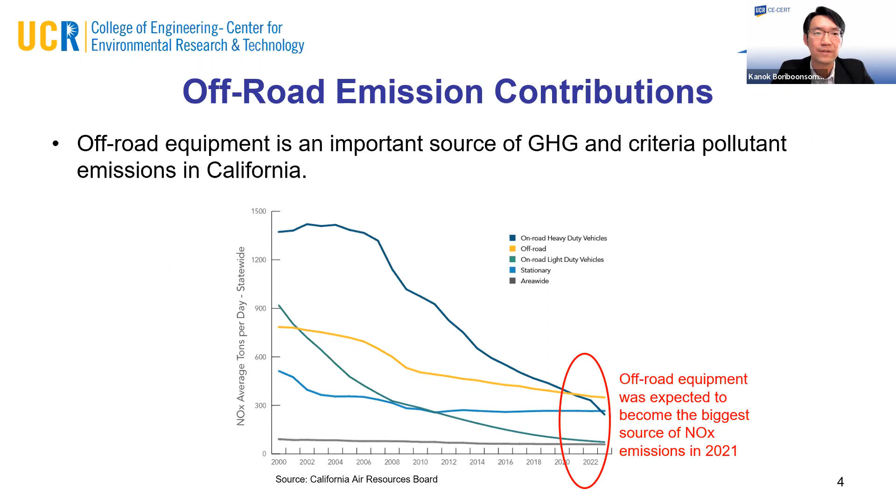But over time, their contribution has been decreasing, and it was projected that by 2021, off-road equipment would actually take over and become the biggest source of NOx emission in the state. I haven't had a chance to look back to see if that's the case, because now we are in 2022, so it would be interesting to see.

And as you know, back in 2020, the California governor signed executive order N-79-20, also mentioned by Xi. That executive order mandated 100% zero emission vehicle sales of passenger cars by 2035. Along with that, it includes several other mandates, and the one applicable to our presentation today is the last one, which mandates zero emission off-road equipment by 2035, with the caveat of where feasible.

We were in the middle of the project when this executive order was signed, so hopefully the research results from this project could help with determining where it's feasible to electrify or go zero emission for off-road equipment.

In terms of project goal and objectives, the overarching goal of the project is to look at different pathways for hybridizing or electrifying off-road equipment in order to maximize both climate and air quality benefits. We also want to make sure that these pathways are technically as well as economically feasible.

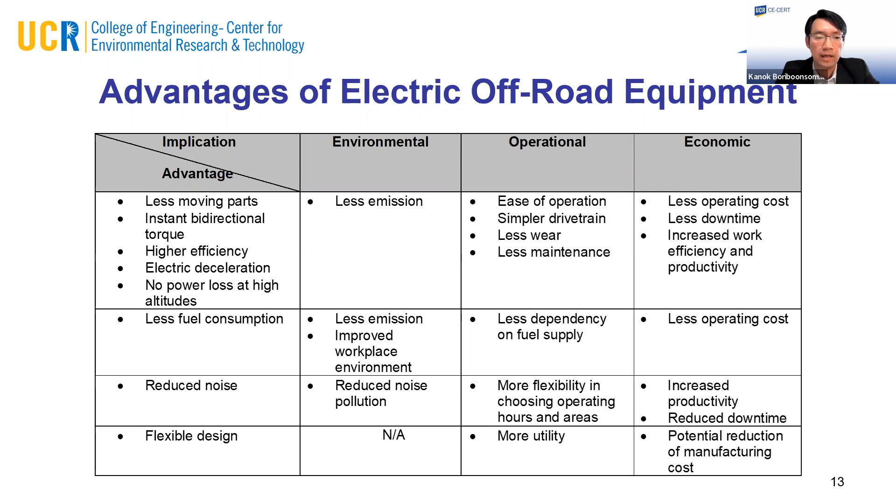And from our review, we also identified advantages of electric off-road equipment as compared to their diesel counterparts. And there are many of them, right? There are fewer moving parts. The electric motor has higher efficiency, and obviously, if it's fully electric, they consume no fuel. And one of the things that is a little bit surprising and not receiving a lot of attention is the amount of noise that is reduced. Electric equipment is a lot quieter than diesel equipment, and that is something that operators enjoy a lot.

But there are still a lot of barriers to overcome in order to make electric or zero emission equipment more prevalent. But for each of these barriers, there are also potential solutions that can be used to overcome them. The main one, the first thing in a lot of people's minds, is the short operating range, because of the limitation in how much battery can be packed onto the equipment. But as I showed in the previous few slides, that is changing very fast.

Another major one is the lack of charging infrastructure. And that's true not only for the off-road sector, right? That is also a concern with on-road vehicles as well. And obviously, cost is still a major barrier. These electric versions of the equipment are still much more expensive than the existing equipment, and there will need to be some incentives in order to help bridge the cost parity gap at this moment in time.

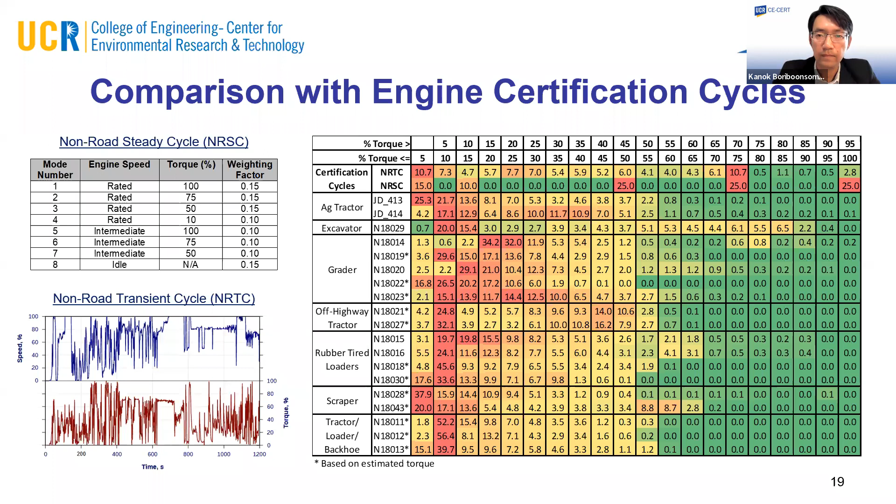This slide shows the detailed joint distribution of real-world data in terms of torque and engine speed as compared to the joint distribution of the certification cycle. And again, when we look at the histograms for the engine speed as well as for the torque, we see that the two histograms are quite different from each other.

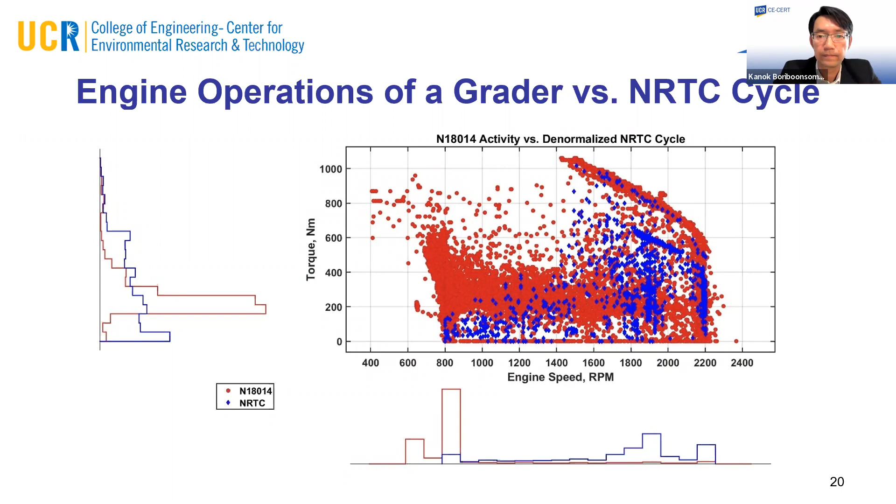In the next section, I will talk about the technical feasibility of electrifying some of these off-road equipment and see which one can be electrified and which one still need more development.

And we use the maximum values as the requirement that can be compared against the current motor ratings of commercially available motors. And we use the upper adjacent values to compare with the continuous rating. So based on the distribution that I showed in the previous slide, we are able to summarize the maximum value and upper adjacent values for each of the equipment that we have data for.

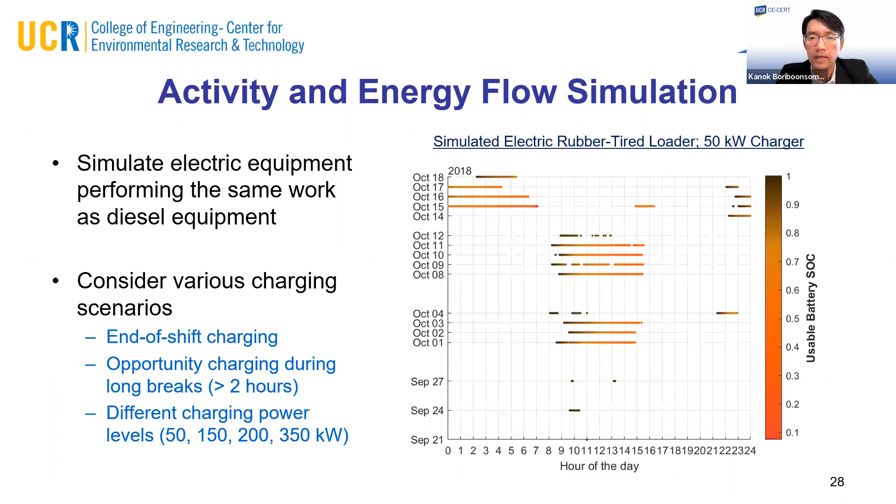And this is despite the overnight charging, like from 7 p.m. to 7 a.m., that's 12 hours. That's still not enough because the scraper is so big, the battery size is so large. So for this scraper, a 150 kilowatt charger will be needed, and that will allow the overnight charging to be able to top off the battery to 100% before the next operating day. And doing that analysis for all the equipment in our data set, we can summarize that.

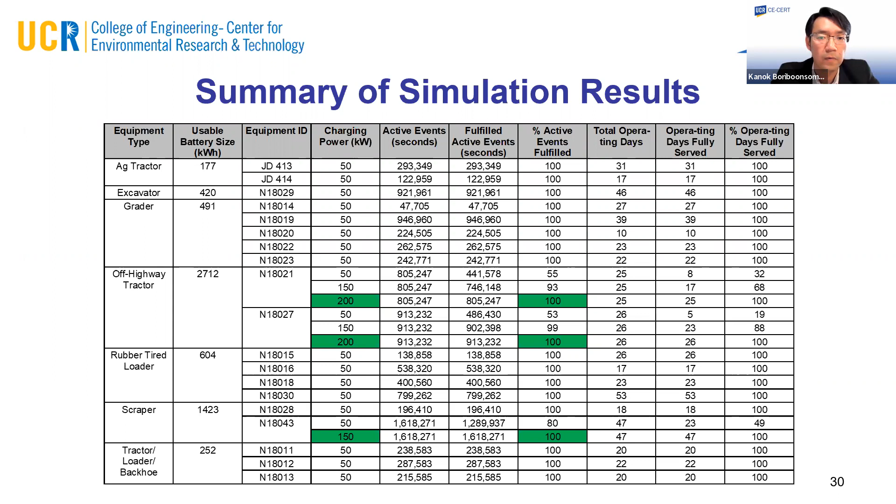In the next section, now that we've determined which types of equipment can technically be electrified based on motor and battery size, we'll look at the cost effectiveness of electrifying off-road equipment. One of the major barriers to electrifying and deploying this equipment is cost - the capital cost fleet operators need to invest to purchase electric equipment right now would be much higher than existing technology.

So in this cost effectiveness analysis, if an incentive program is to be designed to encourage the transition to electric equipment, where should we invest those incentive dollars first? To do this analysis, we use data from the California Air Resources Board off-road inventory model called Offroad 2017, which contains data regarding population, activity, fuel consumption, and emissions for all off-road equipment types in California.

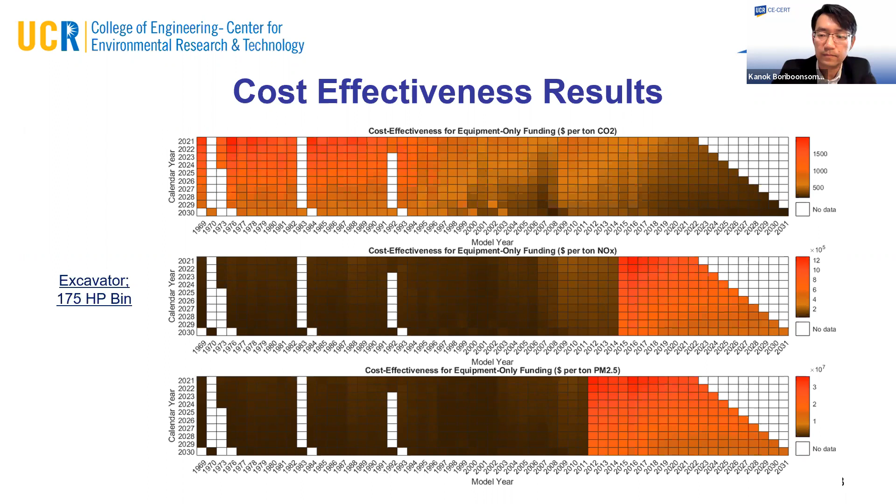But if we look at some areas, there seem to be some differences in the model years 2002 to 2009. So having this information allows us to customize the funding program to a specific model year.

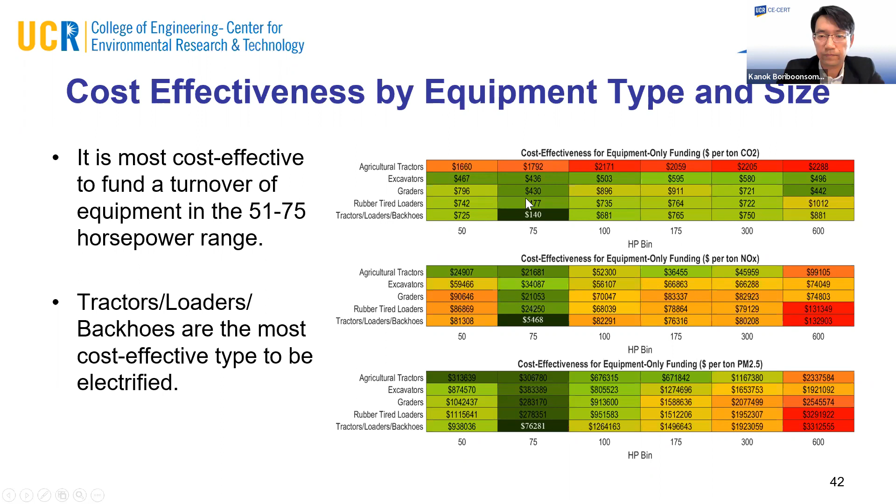One thing I'd like to point out is the numbers you see in the previous few slides in terms of dollars per ton reduction of emissions. Those numbers may seem high because the cost assumptions we used were fairly old, from one of the literature several years ago.

All right, I think we are almost an hour, so I'll go through the key takeaways quickly, and then we can go to Q&A.

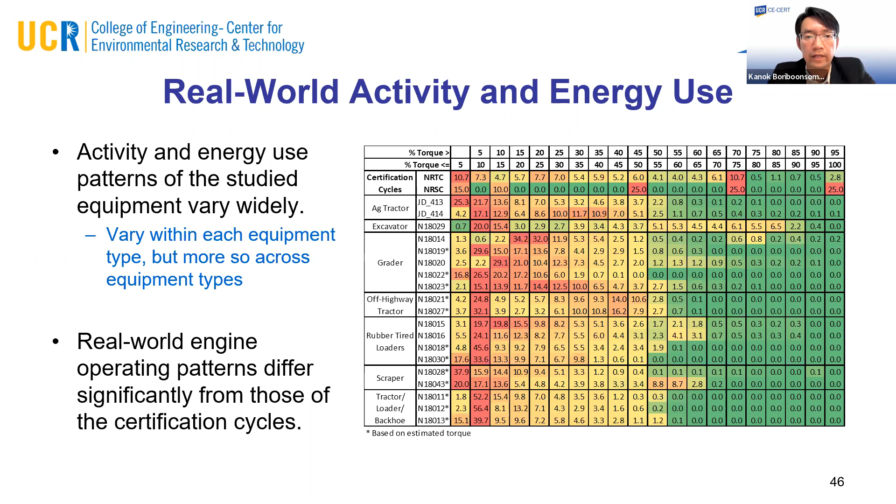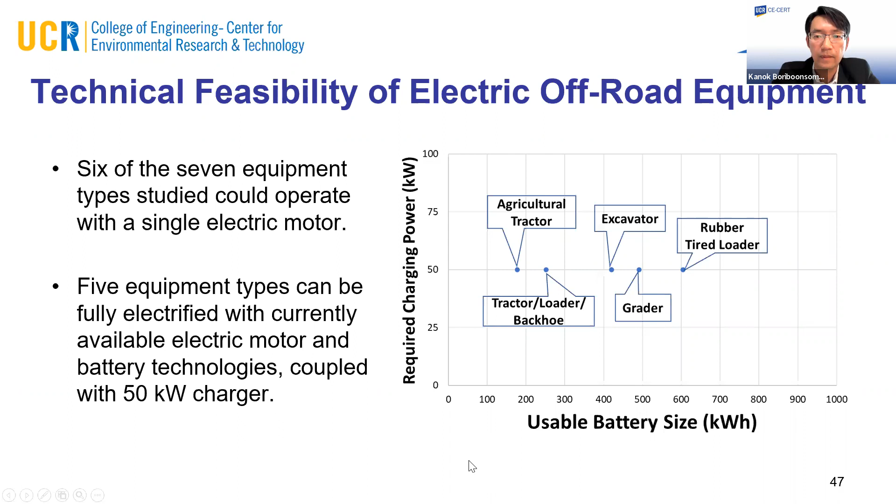In terms of cost effectiveness of electrifying this off-road equipment, again, it's generally more cost effective to electrify equipment smaller in size than 100 horsepower. And the dollar per tons of emission reduction today would be about half of the results shown in the report and on this slide, because battery prices have dropped so much over the past several years.

So for recommendations, based on what we have found, it makes sense to initially focus on the most popular and top emitting equipment types. These include agricultural tractors, excavators, graders, rubber tire loaders, and tractor loader backhoes. In a similar way, it makes sense to initially focus on equipment with 100 horsepower or lower to begin with. These equipment account for about 78% of the total population of off-road equipment in California, and also about a quarter of diesel fuel consumption.

And on top of that, it's relatively more cost-effective to electrify these small equipment than the larger ones. So dream big, but start small.

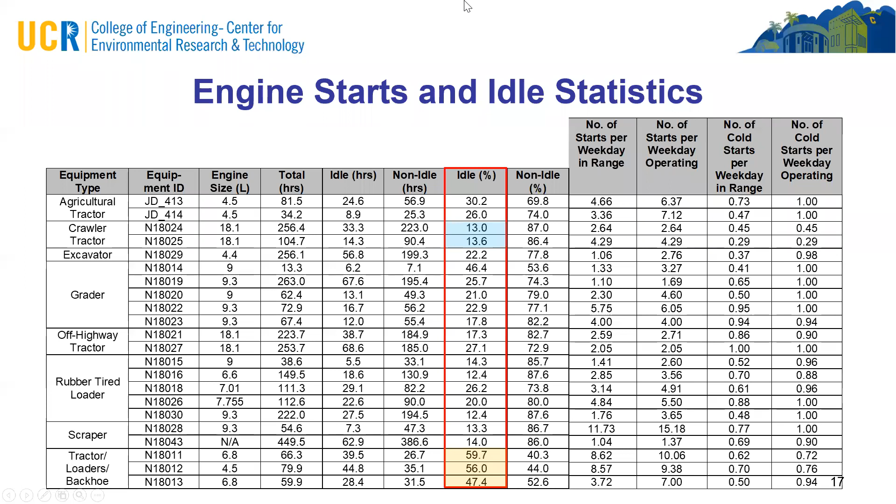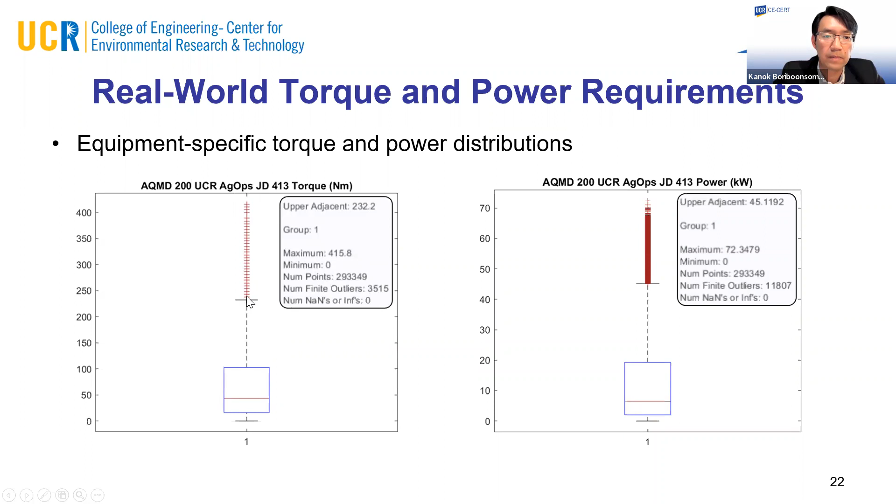Can I ask a follow-up on that same question? Go ahead. So, if I remember the slide correctly, it looked like you had a box plot. So even if it, say, operated at 70 horsepower peak, you didn't go to the top of the box plot, you picked a certain level below that, or did I misunderstand that? Yeah, so in this box plot, we use both the peak values, which is the maximum point in the box plot, as well as what is called the upper adjacent values here. So the maximum value is compared against the peak rating, and the upper adjacent is compared against the continuous rating.

I guess my point was, it looked like there was a statistical analysis that, say, 95% of the time it was operating below here, so we use that as the equivalence point, as opposed to 100% of the time. If you pick the absolute peak, right, then it's going to be higher. And so, was it the absolute peak or not? And if not, then that means that however it actually got used, it wouldn't be able to do that with the smaller battery size. It's based on absolute peak. Yes. Are you referring to motor sizing or battery sizing?

So you mentioned it was based on actual operation, and the previous commenter was saying, okay, say it's a 100 horsepower tractor and it only operated to a peak of 70 horsepower. Did you use the 70? And you said it was the 70. And I was saying, okay, it looked like there was a statistical box plot, and that the top of that plot was not being used, that it was the top of the box, or some 90 or 95% range, and that's what I was asking about.

Oh, so we use the top of the box plot. So for example, for the motor, we make sure that the maximum torque required or maximum power required, shown by the data, is below the peak rating of the available motor. Okay, thank you. Great. Let's move on to the next question.

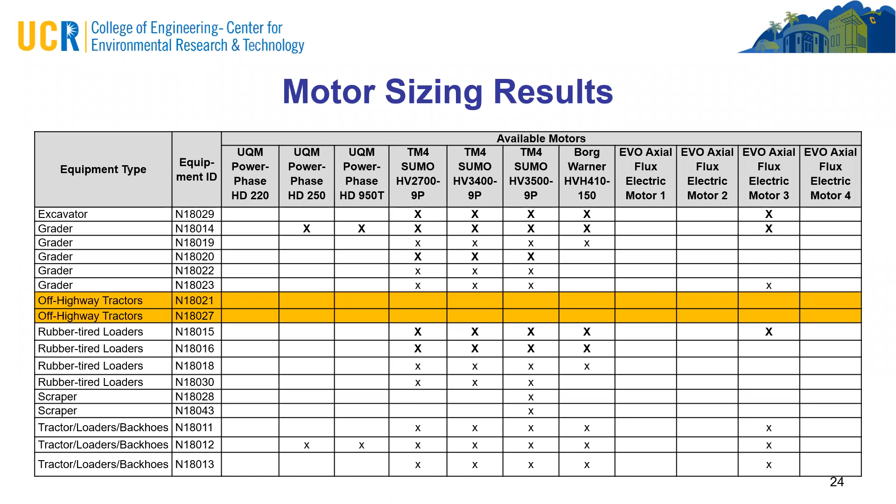There's a lot of us out there that are willing to share information, and we converted our whole ready mix fleet to natural gas and used renewable natural gas because it made more sense for everybody and for the environment. So I'll get off my soapbox. Thank you for the comments.

So your comments are very true, and this kind of study is one of a kind, and it's very pioneering even for CARB. So that's why we have really limited resources, and we can't really test as large an amount of different kinds of tractors as we would like to. But Kanok, do you have anything to add to this comment? Yeah, thank you for sharing that insight. And I agree. Right now, we are very limited to just this set of equipment that we collected data from. And we would have loved to expand the data collection and analysis effort to cover a larger population.

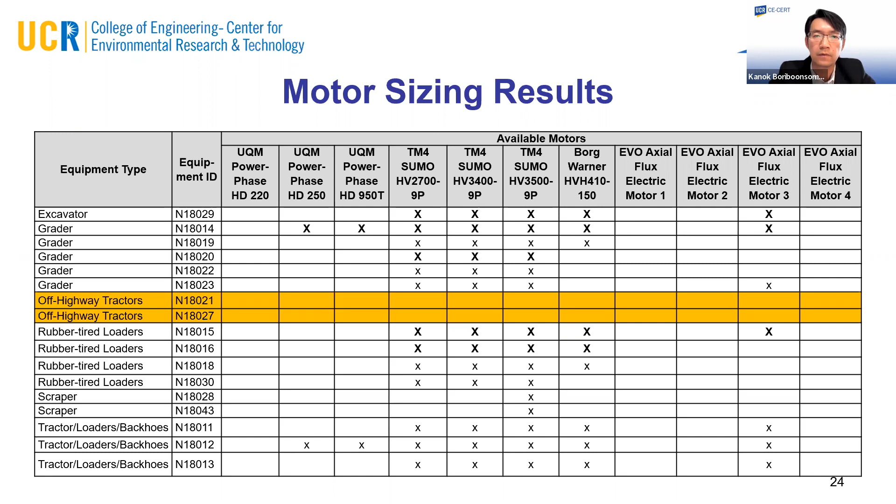And I also see your comment about the cradle to grave or life cycle analysis. That's one of the things that we discussed towards the end of the project, as well as potentially something to look at in the future. So all these are good comments.

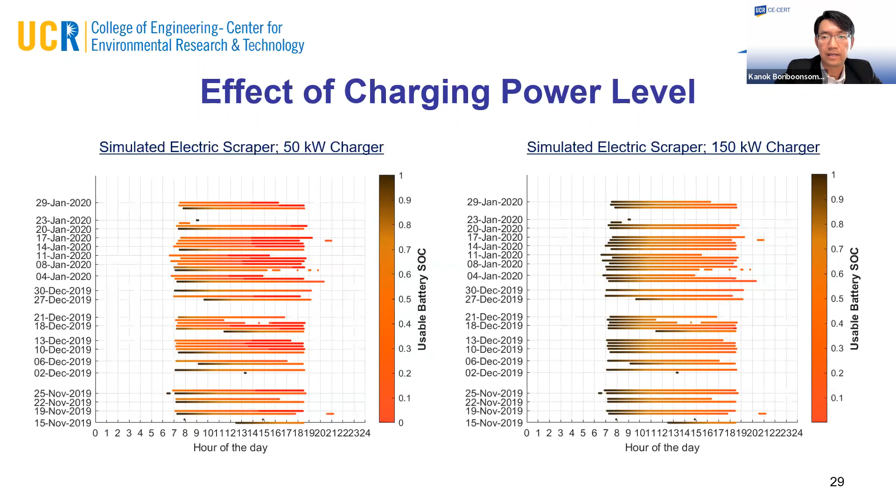So let's move on to the next question by Danielle. By dropping in, are you meaning you assumed and did not account for costs associated with redesigning the equipment? Yeah, we do account for that. I'm trying to get to that slide. So we have an assumption regarding what is called advanced engineering costs that basically cover the R&D towards the redesign of the powertrain.

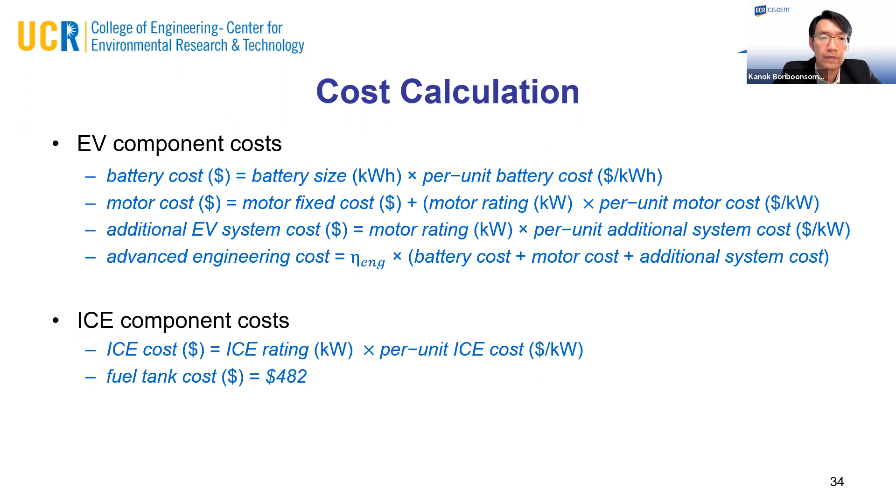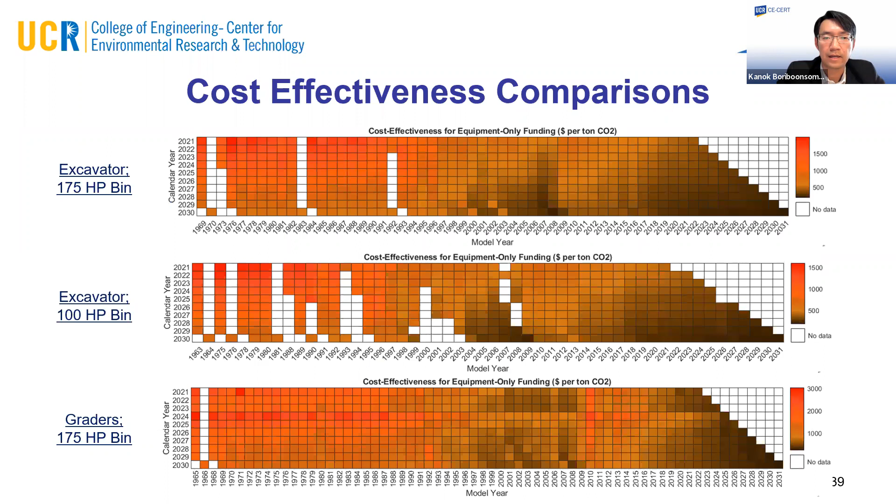Right. So the next question is, did the estimated cost match with the year 2020 actual cost? Yes, this is interesting. It did not match. We used data from the literature that we found at the time of the study. And as I mentioned, the projected value of battery price is actually much higher than the real price. So the real price is just about 50% of the projected value. So the numbers in terms of cost effectiveness are overestimated. So it should be a lot cheaper, like by half.

So the next question is, it looks like we're not looking at the fuel cycle of EVs. What NOx and CO2 is used to produce the energy to charge the equipment? It sounds more like a comment. So right, yeah, I think this goes back to

the life cycle analysis. But especially for CO2, at least in California, the source of our fuel, our electricity, is getting cleaner and cleaner, right? We have at least 40% renewable in our electricity mix. So hopefully that will help with this concern. Right.

So the next one is in relation to the cost of a battery kilowatt-hour chart: the costs were projected to 2030 from 2015. That's correct. Yeah, it was the source of data that we had, and we used 4 data points to do interpolation as well as extrapolate it out.

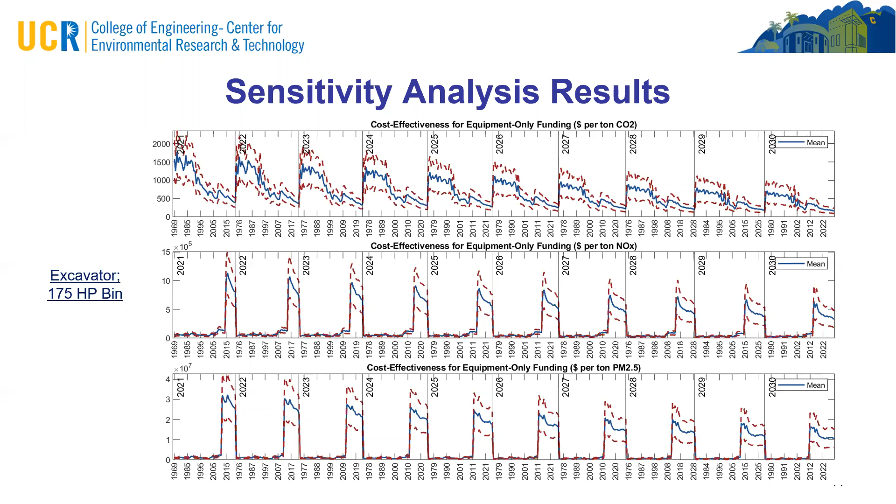Yes, that's correct. We assume that if someone like CARB were to create an incentive program to fund the turnover of diesel equipment to electric equipment, the required amount of funding per piece of equipment would be the difference between the EV component cost and the current component cost of diesel equipment.

And with regards to the cost of the battery, it looked high again because the data from the source that we used overprojects the battery price quite a bit. In reality, battery prices have come down a lot, and it should be just about half of what the projections show.

Right. Oh, sorry, real quick. Does the report include anything on what the actual cost of that would be? Like, would it cost us $500 billion to electrify equipment, or a per-equipment cost, something like that might be useful? Yes, we do have the raw numbers in terms of the actual dollar amount per equipment, and that can be multiplied by the number of equipment of specific types to arrive at the total dollar amount that would be required to electrify the whole category. Right, and the report will be available online as well.

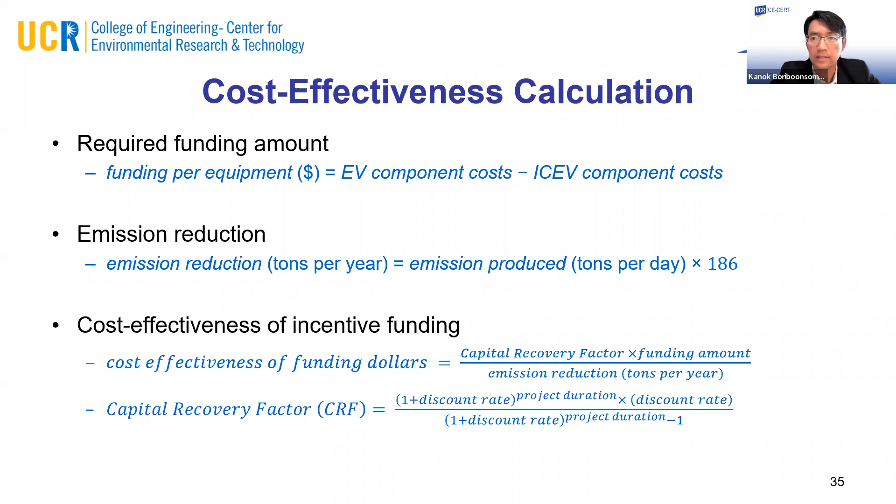So Kanok, can you answer the question? Yes, I'm not sure if this is in the context of energy consumption or cost effectiveness calculation. With regards to cost effectiveness calculation, we did include advanced engineering costs. So the need to redesign the powertrain to make electric equipment work is accounted for in the cost calculation. Hope that answered your question, Bill.

I just put the online source here for everyone's information, and we're going to go through the questions, and if we need to go back to the main presentation, I can switch back. How were barriers to feasibility quantified for equipment that would have to be redesigned to accommodate mass increases associated with full electric versus ICE? Question from Patrick.

Yeah, I think there are multiple layers of barriers. From the technical barriers, we did not dive deep into how the powertrain or the equipment would need to be redesigned or engineered for that. We did include the advanced engineering cost in the cost effectiveness analysis, but that is not the main focus of the analysis.

Now in terms of market barriers, I think those are something that still need to be further studied. There were a lot of comments earlier about how OEMs in the off-road sector might compete or be able to get batteries with a price in line with what on-road OEMs might get. So those are things that are not part of the study, but hopefully CARB will look into in the future.